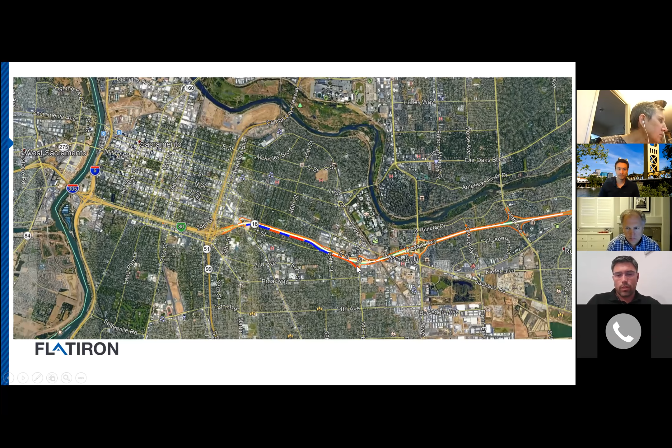This first slide is just showing our overall project limits. It's from I-5 and 50, and all the way down 50; pavement gets replaced to Watt, and then we restripe past Watt, like you can see here. So the limits of the sound walls, as I'm sure all of you are well aware, are from about the Stockton Boulevard on-ramp, eastbound 50, to the 65th Street off-ramp. So just to zoom in on that a little bit, and forgive me for maybe repeating some things from the public process in the environmental phase that you already know.

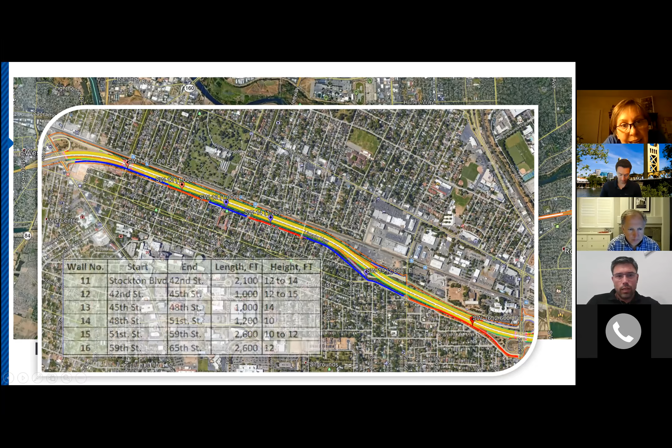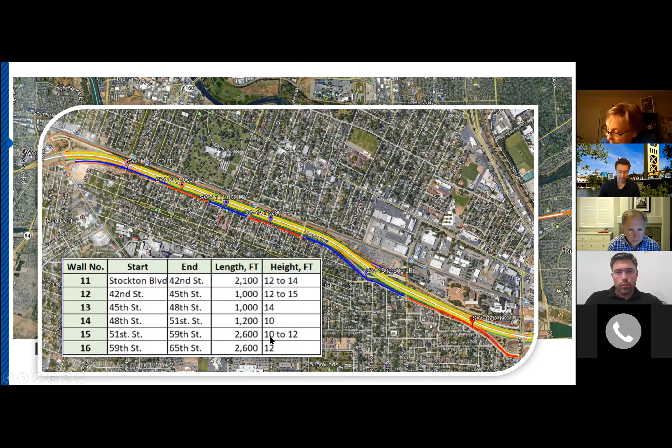The sound walls, are you familiar with any of the numbering that they're given, or is it just sound walls to you? So basically, you can see different colors along the eastbound freeway here. Blue, red, blue, red, blue, red. Each wall is given a number. This starts with sound wall 11, 12, 13, 14, 15, and 16. That's how we distinguish them. For instance, wall 12 is from 42nd to 45th Street, approximately. The walls are about 1,000 or 2,000 or 2,600 feet long, and they're all about 10, 12, 14 feet tall.

This is pretty typical of many sound walls built along a state right-of-way. They're going to be masonry block walls. And in case some of you aren't familiar with the different foundation systems underneath these walls, in this first typical section here's an existing curb and an existing fence. This would be like along some of the areas of F Street. And then there will be some sort of paved surface between where that fence was and the new sound wall.

And then just to show underneath, some of these sound walls have a linear concrete pile cap, and then there'll be cast-in-drilled-hole piles maybe every 3, 4, 5, 6 feet, depending on how tall the wall is at that location.

So these types of foundations get installed by basically a drill rig that comes in and augers out the soil. We place a rebar cage and pour concrete, and then we have a rebar cage along the length of the wall for this pile cap foundation, then we build the wall on top of it.

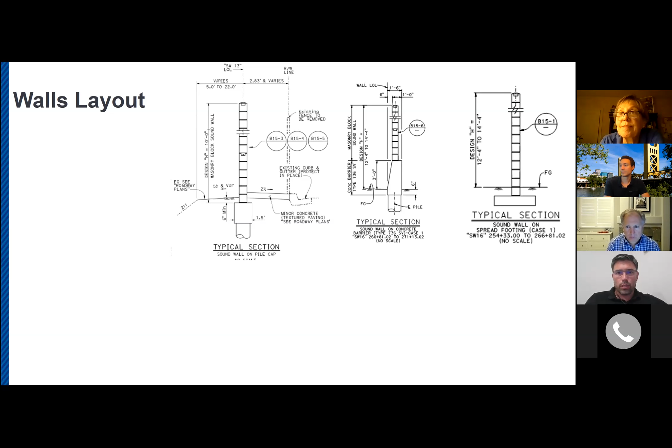And then there's other types that are like a spread footing, and these would maybe be more, if any of you have these sound walls going adjacent to your property line or something like that, there'll be foundations like this as well. Just wanted to let you see what some of them look like below ground, because that's the part that we'll see as we install them.

So that footing in this wall profile here, the footing is below the grade, and OG means original ground, FG means finished ground or finished grade, and so the wall will stick up from there. It's basically letting you know that there's a foundation underneath.

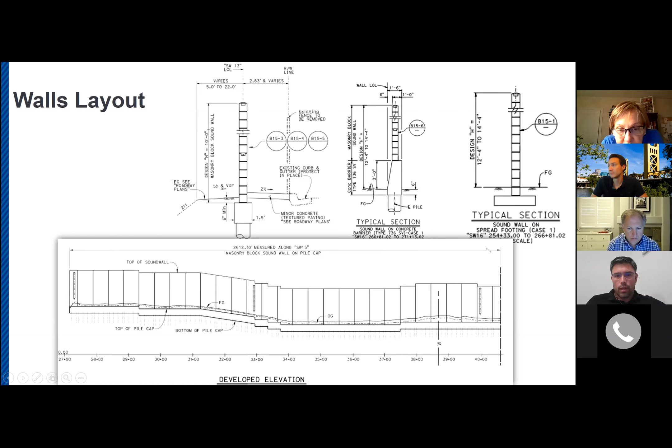Just wanted to put it a little bit into perspective that along the shoulder of US 50, there will be a retaining wall. So it's, say, down here, and that's what we're using to widen out the highway and place the additional HOV lane. And then up the slope from there is where we will be installing these sound walls. Some will be right on the shoulder, some will work their way up the slope, and some will be up at the top of the slope. Just a typical section view.

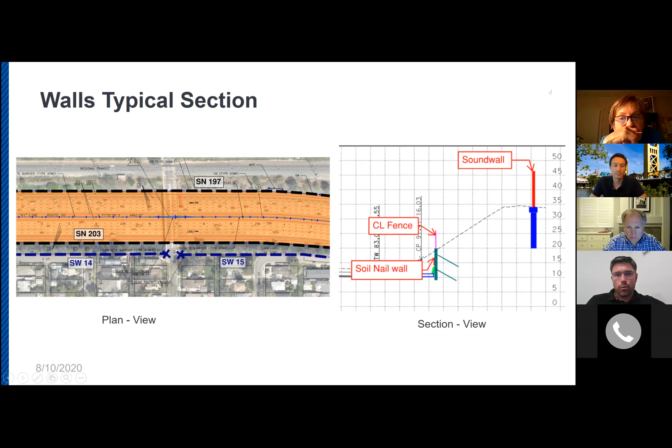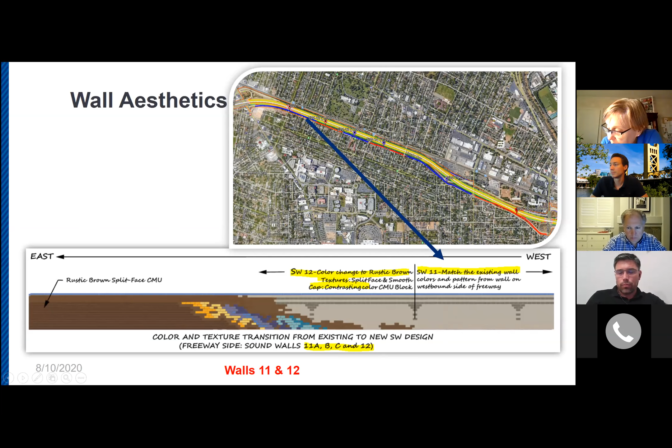As far as the aesthetics, these are the parts that the Caltrans landscape architecture folks have provided to us. So I'm just going to walk through some of the walls, starting with wall 11. The aesthetic is what they call a teardrop pattern on the gray walls, and it's matching an existing wall. And then it transitions into wall 12 here, which is between 42nd and 45th Streets. It transitions into what's called a rustic brown.

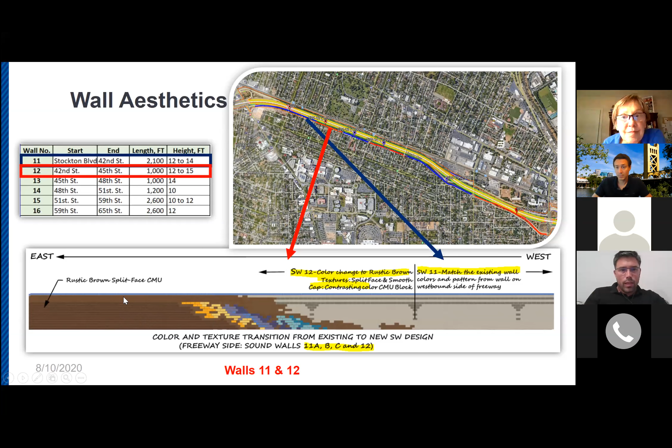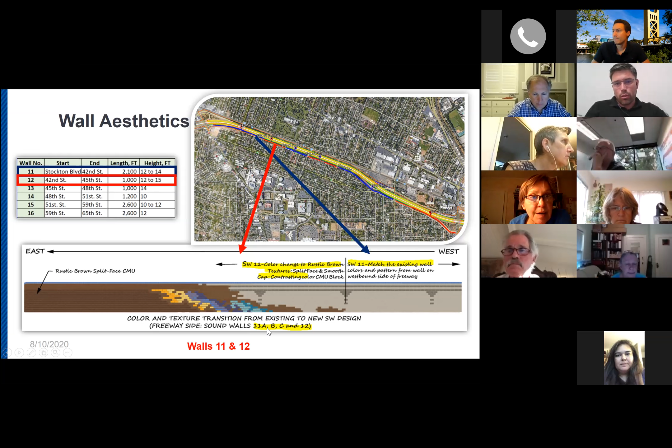So these masonry blocks are split face, I'm sure everyone's seen that, where they split the face and it's just kind of wavy. And then on the top of the wall is a smooth face. This lighter colored brown is a smooth face. It's just a change in texture. I think it's all a singular brown, but it looks different on different textures. And there's some accent colorings that have been placed for that transition. So walls 11 and 12: 11 the gray, 12 transitioning into this rustic brown.

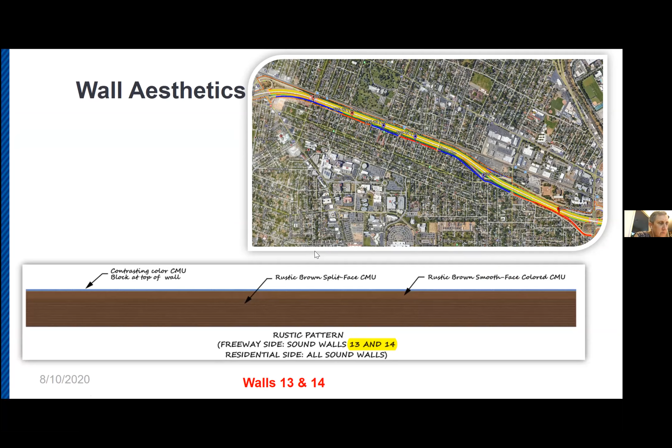What we're looking at here is on the freeway side. So the brown has this accent color as you drive along the freeway, and the rustic brown is on the neighborhood sides of all these walls, from walls 13, 14, 15, and 16, all the way down the rest of the neighborhood. So all the walls on the neighborhood side are rustic brown, and walls 13 and 14 on the freeway side are also rustic brown, like we see here. That's walls 13 and 14, from 45th to 51st Streets, just referencing some of your neighborhood streets.

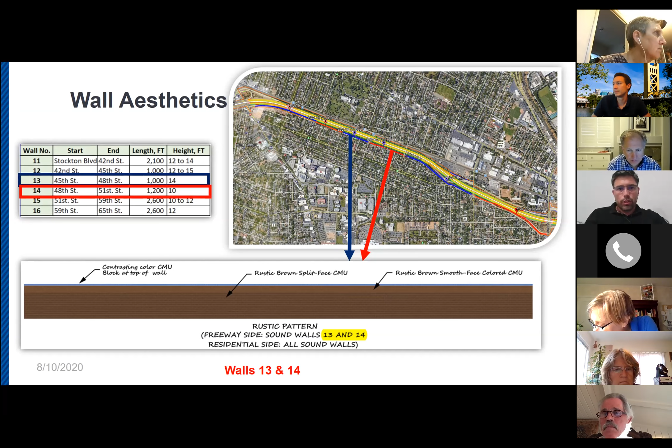Walls 15 and 16 start to have what Caltrans is calling a mosaic color pattern on the freeway side, and again the neighborhood sides are that rustic brown as well.

Was that a question? Well, I just asked the organizer to send me the link again to your email. Okay. Move along.

Okay, and so 15 and 16 go all the way down to 65th Street. And we also have plasma cut stainless and weathered steel figures that are mounted along the wall. I believe there's 9 sets of these pairs of 3 along the wall as you go along.

Does someone want to? Yeah, can you mute them?

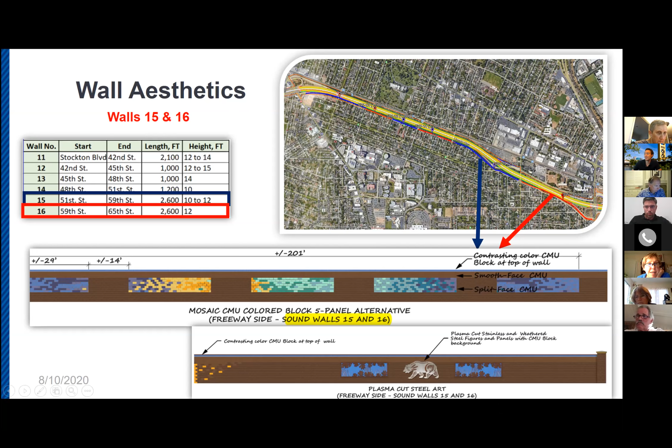Okay, so as we look at what this neighborhood side looks like, the rustic brown, it's going to have these steel plasma figures on them, and these are trees. And on the freeway side is where the bear and the oak leaves go. And so these are kind of renderings that we recently put together just for this meeting to show what those might look like in perspective as you're driving along the freeway through the freeway side of the neighborhood there.

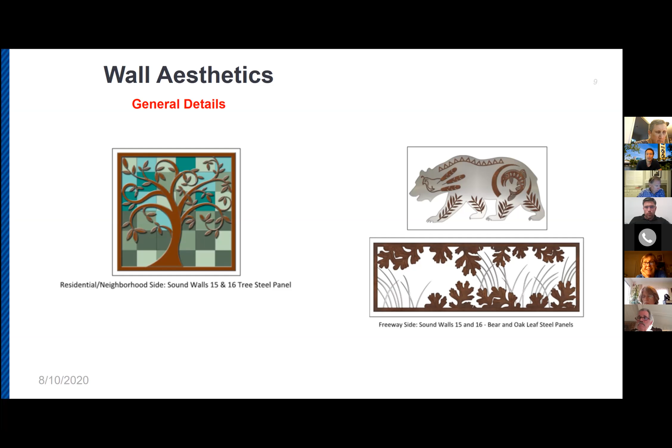And then again, this is the neighborhood side artwork. This is the freeway side artwork. And then these are just kind of a zoomed up version of what this detail looks like of the neighborhood side. Tree steel panels, and then on the freeway side, what the bear looks like and the oak leaves. And that hopefully answers what the walls will look like.

Do you want to take questions now, or do you? I have a couple questions. They're going to build it pretty much. The wall's going to start. Sure. Jim, did you want to maybe say anything more first, or do you want to do questions? Manuel, can you mute the caller, because I'm not sure that they're actually talking in the meeting. Thanks. Unmute myself.

Yeah, some of you know that Caltrans has been pursuing this project for a long time, and there's been some community meetings and a lot of environmental process that went through. And so our landscape architecture folks have been involved, and these were the designs that they kind of came up with for this area. So hopefully this looks good at this point to you guys, but yeah, we can entertain some questions about this if you would like.

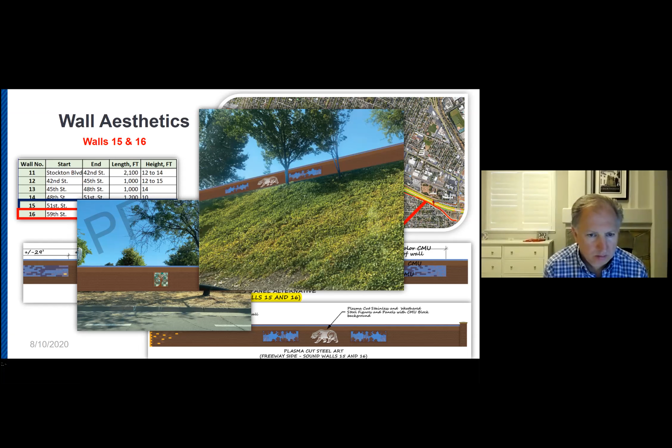Well, I had a couple questions. One is, there's obviously some variance in the height of the wall. Why is that? And some of them are not even specified. I mean, you go from 15 feet to 10 feet. That's one question. Can you also clarify, are they repaving all of 50? That's my second question. And my third question is, can you just explain the dynamics of the sound wall? I look at this picture, the freeway is already fairly low down, and it looks like the sound wall is pretty tiny. How is that going to impact the sound? So I have those 3 questions.

Thank you. Okay, so. And actually, as you answer those questions, I'm going to just ask folks that are in the call that if you do want to ask a question, please raise your hand or type in the chat box that you want to ask a question so that I can unmute you and then we can recognize you.

Thank you. So the first one, the reason the heights vary is just because the terrain varies. We start down at ground level, at roadway level at Stockton, and then go up along the top of the slope and then back down along the highway. So the height is varying just as the ground is varying. And then yes, all of Highway 50 is going to be reconstructed from I-5 out to Watt Avenue. All of the pavement's going to be removed and replaced.

And then as far as the sound wall, how it works, it's primarily a line of sight between the houses and the highway, which is generating the noise. So that was all done in the preliminary stages where they did noise studies and they set up microphones all over the neighborhood, and that's what they came up with.

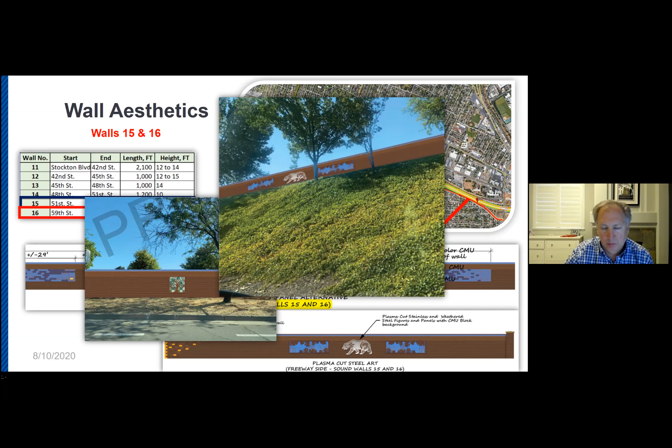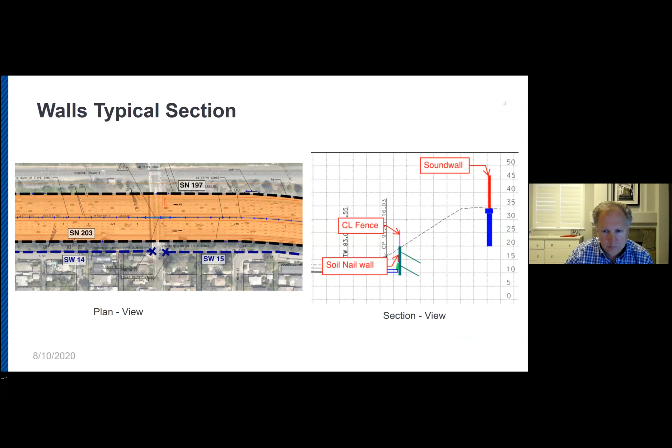Yeah, it might help to also say about the varying heights. What we're given based on the noise studies, I'm trying to go back to one of these drawings here. Here we go. What we're given is the top of the wall elevation, more or less, that was derived from the noise studies. And then you can see as foundation steps happen, like Jim was explaining with the terrain, sometimes the top of the wall will step up with it, and sometimes that'll generate a taller wall in that area where we're stepping.

So, for instance here, the terrain is going up in the back, but the foundation is staying level, so the actual H height on the wall, the masonry part of the wall, is getting higher just because the ground is going up behind the footing. So what's given from the noise studies is the top of the wall height to facilitate the noise wall effect.

Thank you. I see a question from Sara Peña. So I'm going to ask you to unmute yourself.

Thank you, Robert, for the presentation. Do you have start dates? I'm particularly interested in Sound Wall 15.

Yeah, so we're designing the structure parts of these walls, and our goal is to have our design approved by Caltrans by the end of this year. What that'll mean for construction and start dates in the field, though, is there will be time this fall when we're starting to do some of the clear and grub and removal work to prepare for that, and also some utility relocation work that will be happening this fall just to prepare the way for these sound walls.

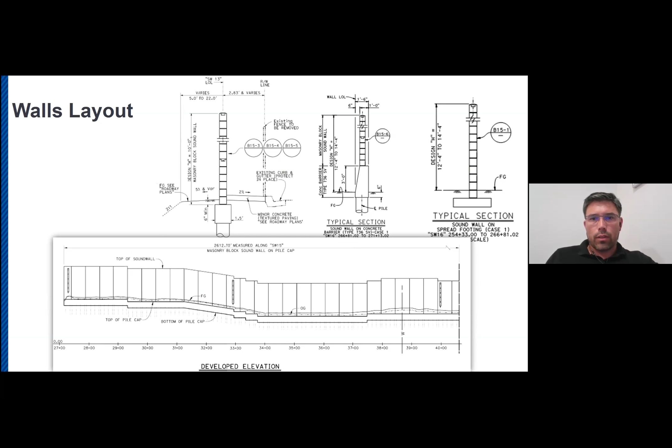As we're doing some potholing and checking, verifying that we can work around some of those utilities, if everything lines up, it should be that the wall construction happens right around the first of the year. Pat, I didn't know if you had anything else to add. Pat is our construction manager, and he's joined the call with us as well.

Thank you, that's helpful. Is it all happening at the same time, or are you starting at one end or the other? Yeah, maybe Pat, you could briefly speak about that. Yeah, so as Robert said, obviously it's still in design, but generally, Wall 11 starts out by Stockton Boulevard. So we'll be working generally out there towards, I think it's 39th Avenue, and then working east from there,

just generally behind the houses, and then there's a couple of areas where it gets fairly tight. I think around Sound Wall 15, where the surface streets aren't contiguous. So you'll see us working probably eastwards, and then where we're in what we call a two block, we only have one way in and one way out. Then we would work outwards in those locations.

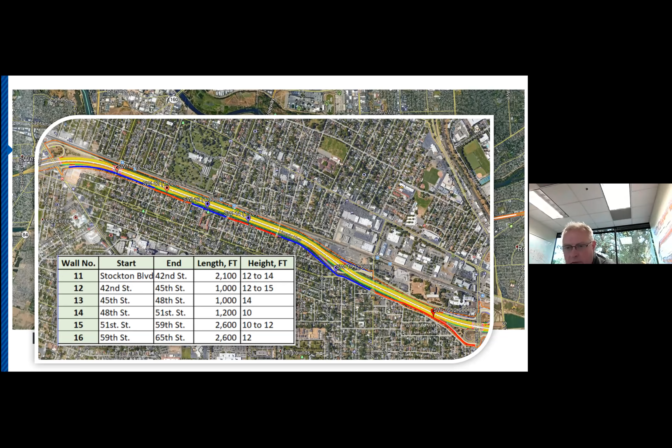So the net effect would be, we're generally working across the corridor with drilling crews, concrete crews, forming footings, putting rebar in, pouring the footings, and then finally installing the masonry block in its various phases and lifts across the alignment. Generally, all told, it would probably take 9 months to a year to construct all the walls.

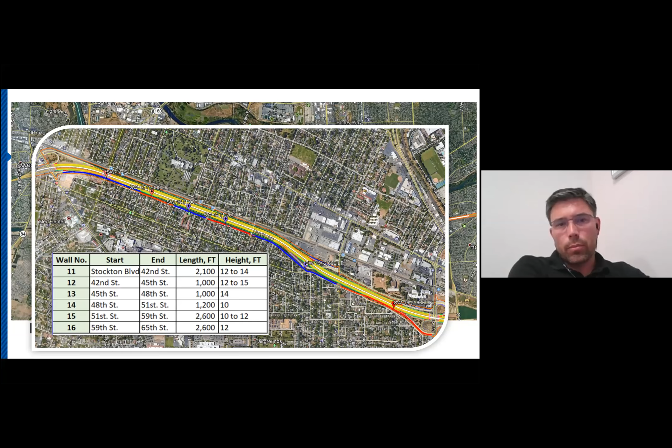So I will add that the schedule that we're working on now is being developed as the different foundation types get identified. So the exact sequence and how we go about them will depend on how easy that access is to obtain, and like I mentioned, where the utility protections might need to be, and if we have 2 or 3 different foundation types, they'll be worked on depending on what crews we have available, in order.

So if one wall has a spread footing type, then it can be worked on at the same time as the other wall that has a drilled foundation footing type. So we'll be working at multiple places along this corridor. Thanks, that was super helpful. So it sounds like from what Pat said, we could probably expect by the end of 2021 to have the wall done. Is that an accurate guesstimate? Yes.

Thank you. And I'm checking the chat box. We have a request from Mr. Adam Holguin. He's asking if you can share a P6 schedule with the ENA for distribution. We're working on that schedule now, and I believe we should have it approved in September, and we can talk to Caltrans about parts of that, how it gets released

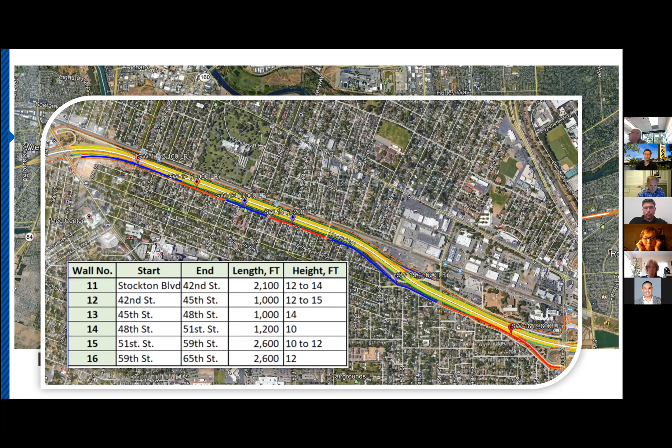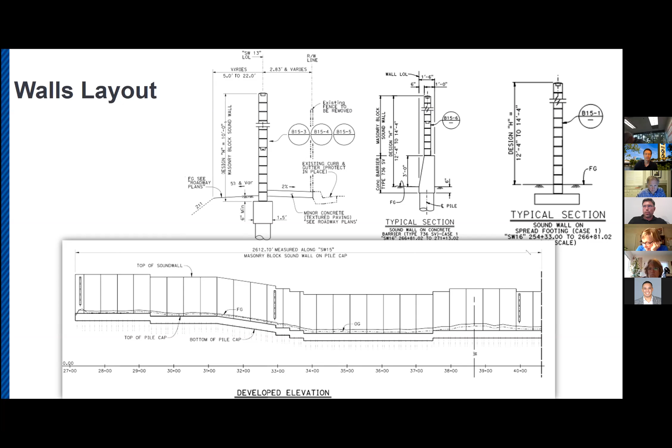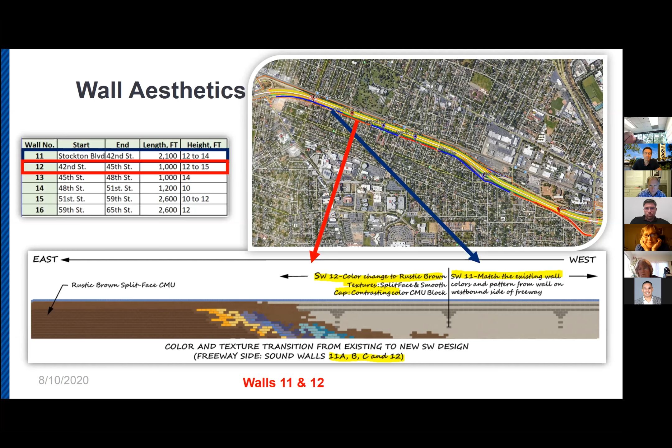I might have to get back to you on that one, because I haven't heard that explicitly in our planning yet. Do you happen to be aware at all? I am not. I haven't reviewed the EIR and those specifics, it was just a question of mine. Mm-hmm. I don't know for sure, but I don't remember any restrictions on when the sound wall could be constructed in the environmental impact report. So, and Maggie, I think you had a follow-up question too.

So sorry, Maggie's question that I see is she's clarifying that the wall will be done first and then the repavement on 50. Yes, that's what I was about to add to that. Our response about the work hours is that, yes, the wall is the first order of work, and that is meant to mitigate the noise during the construction period for the rest of the pavement rehabilitation work, particularly the latter parts of that. What was the next part of the question?

Well, the other part is, clearly the city has restrictions about sounds. I'm a little surprised that, I don't know what time stuff can start work in the morning, 7 or 8. And then, I mean, there are restrictions about noise, and we've just had an issue with UC Davis. So I think it'd be really helpful for neighbors to know that.

Yeah, most of the city work is daytime hours. I think we had our drilling subcontractors out, or they still are out on some of these neighborhood streets doing some work under the city permits in the daytime. And the primary work to install these sound walls is pretty low decibel level in terms of augers in the ground and placing rebar by hand and pumping concrete, and then stacking the blocks up. So the noise level of building these walls is not anything above what would be happening on normal city streets around the city

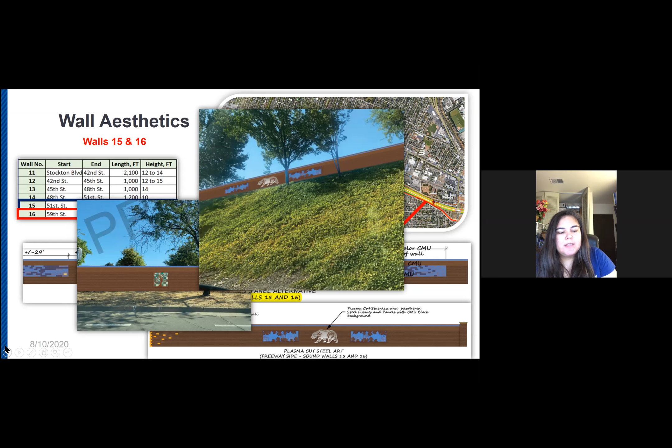And the best way to get information regarding that is if you sign up for the Fix 50 newsletter that we will be circulating. And it's not necessarily a newsletter with mundane stuff. This is a newsletter that will give you the, hey, this week we're going to be doing this type of work, and very short and sweet, not something very lengthy that we're anticipating on sending out.

And you may know our partners is Sagent. So if you see an email from Sagent, that is actually representing Caltrans. Generally they'll represent themselves as an entity of Caltrans, but you might see a Sagent email, and it's not spam. It's actually regarding the project.

Thank you. We have one more question from Aileen Mann. If you can unmute yourself and ask the question. So in some areas along S Street, the highway embankment appears 6 to 8 feet higher than the S Street level. Will the sound walls be on top of that embankment, or will the embankment be lowered for an equivalent sound wall height above street level?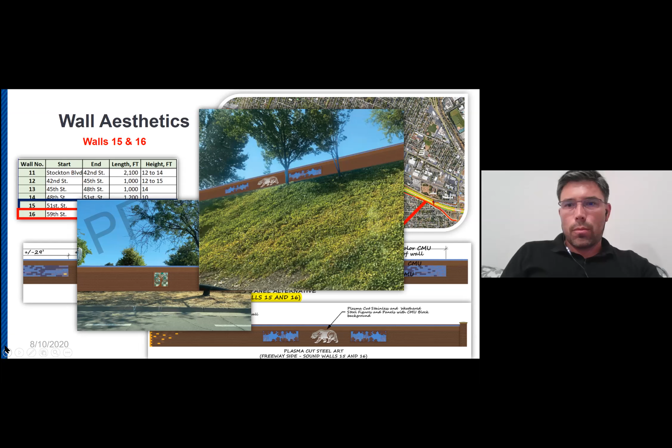So it varies. A lot of the typical sections that I've seen are that it's at the bottom of that embankment, and we probably need to look at something together to make sure we're both talking about the same thing. But it generally is the bottom of the wall at the street level, say right off the street level. But then it does, in some places, transition from the street up and over down toward the freeway. So it does vary.

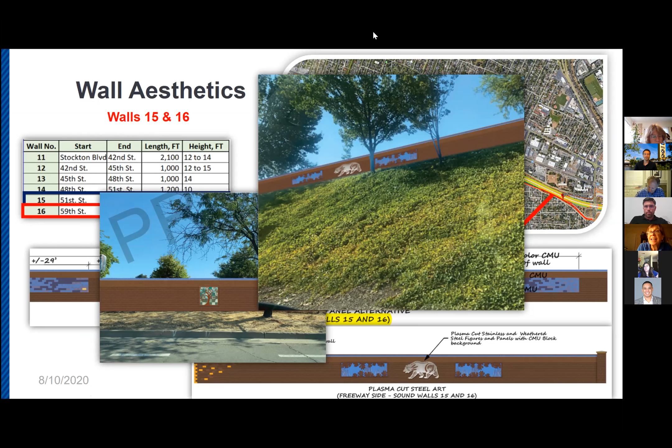I do want to stress that the construction noise from the wall, we understand freeway construction goes on at all hours, but I think it would be our neighborhood's expectation that the wall construction, which is really going to impact the neighborhood if it's right next to houses, would not take place except during the day. Obviously the freeway, you have to work on it, we understand that, but the wall itself, and I don't know who we need to follow up with, but I think it's going to be pretty critical that not be at night.

And I'll just venture to say that most of our folks also feel the same way about their work schedule. And we try to keep daytime work as much as possible anyway. Usually we go to nights only when there's some necessity to do so, because we know we're working on this wall behind a lot of your backyards and right adjacent to a lot of your houses. And that's not any place that we want to be waking folks up unless we absolutely have to. But no, most of this type of work is during the daytime.